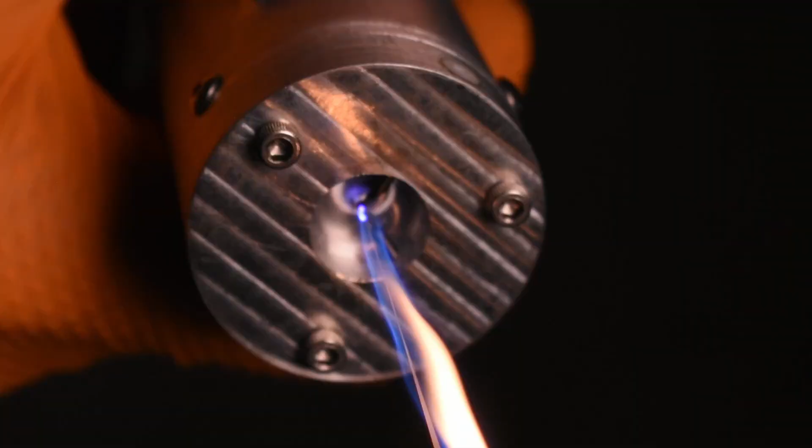Firelaser works by forming a very thin stream of fuel and igniting it with an electric arc. It's fully self-contained with a battery, fuel tank, and pump. It's basically a mini precision flamethrower, but looks vaguely like a lightsaber.

As with all of my projects, after the first version I always come up with new ideas for a second. Basically a never-ending arms race between me and myself.

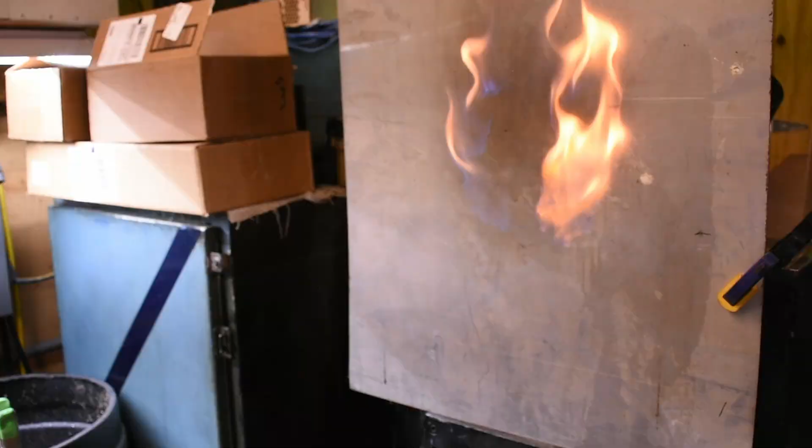For Firelaser, the biggest thing I wanted to fix was the wind issue. The flame was incredibly susceptible to even slight breezes. There isn't any way to completely solve the wind problem, at least not without switching to a completely different type of blade or using very exotic fuels, but there are ways to make it better.

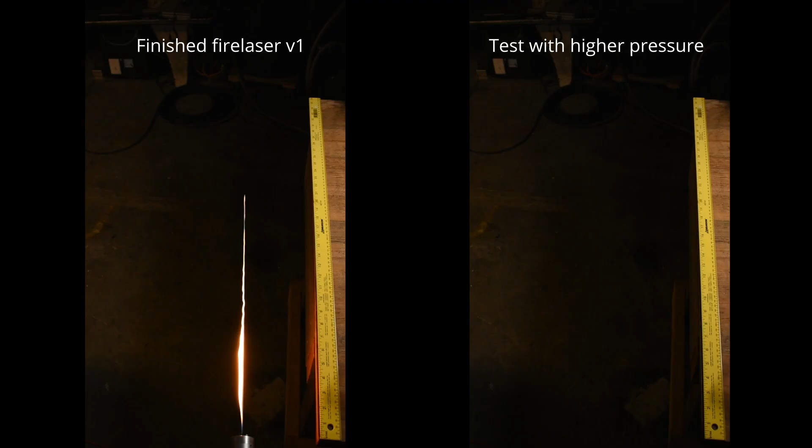What I did find when testing the previous version is that higher fuel pressure tends to result in a more stable flame. To get higher pressure, I need to completely redesign the pump.

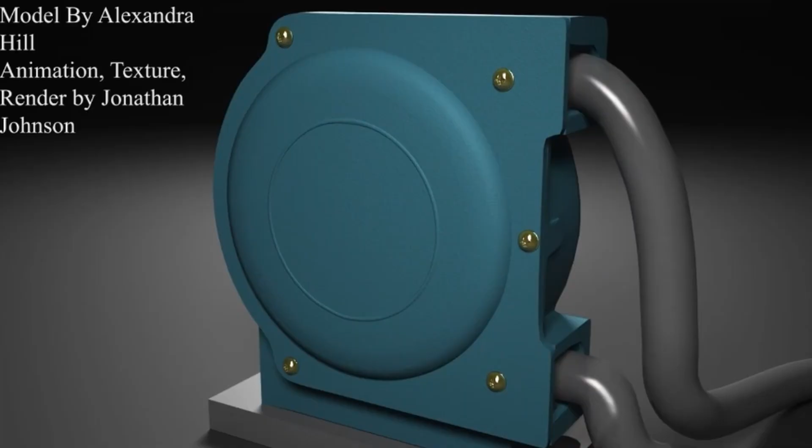The old pump used rollers to squeeze a flexible tube over and over to pump fluid along. This is called a peristaltic pump, and they are quite common when it comes to pumping chemicals, like fuels or solvents, since there's no seals to potentially leak.

The pump needs tubing that the rollers can squish closed to form a moving seal to pump the fluid, so the tubing needs to be quite soft and flexible. The downside is, it's so flexible that under high pressure, the tube itself starts to expand and leak around the fittings.

I previously fixed this in the old pump by using small clamps to keep the tube from popping off the fittings. But even with the clamps, it still couldn't go much above 30 psi without starting to leak.

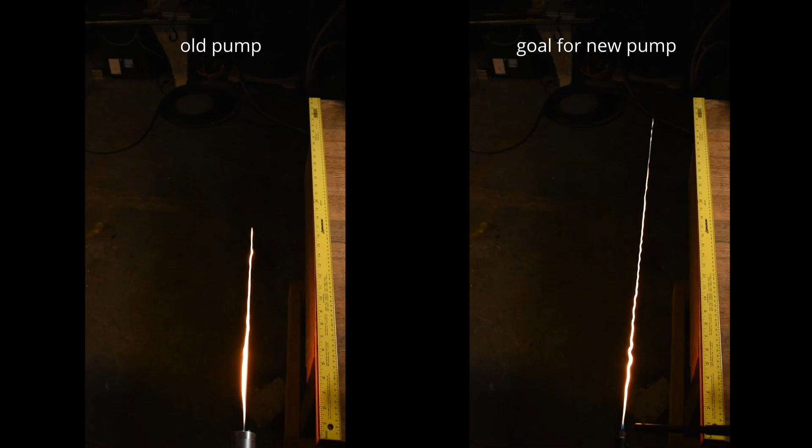For the new pump, I wanted to make sure I could reliably reach higher pressures and flows to produce a more resilient flame. Instead of trying to find a way to get a peristaltic pump to work, I'm going to revisit one of my older designs that I couldn't get working the first time, something called a diaphragm pump.

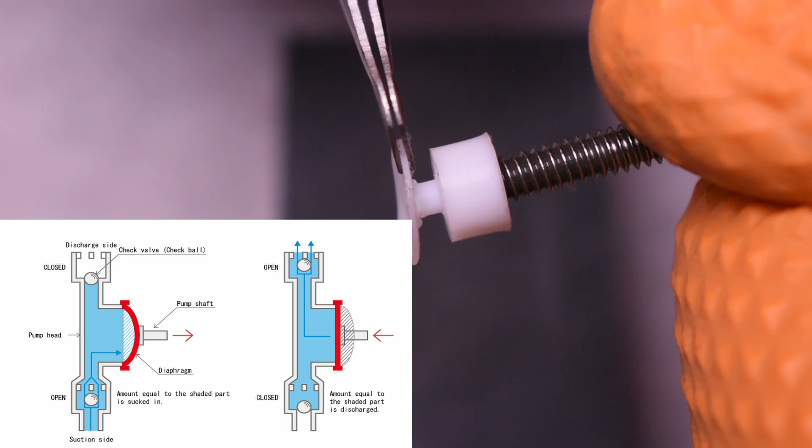Diaphragm pumps are common in industrial applications for pumping harsh fluids since they have no moving seals. Hence, catastrophic leaks tend to be pretty rare, which is perfect since I'd prefer to avoid spraying fuel all over my hands when I'm using it.

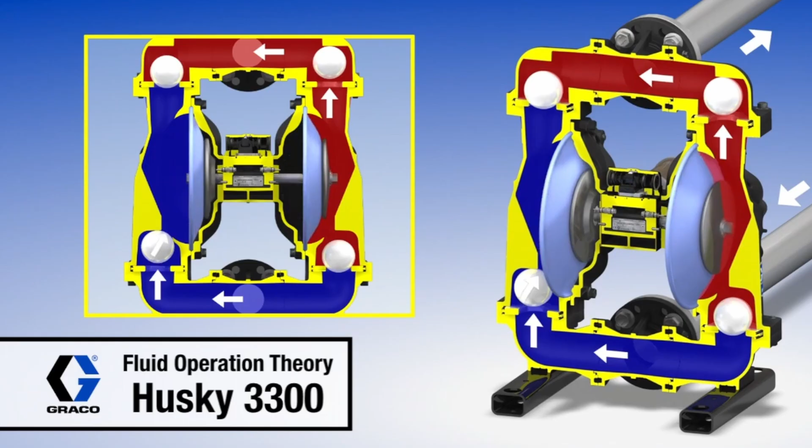The industrial pumps are usually air-powered. They have two flexible rubber parts on each side which are called the diaphragms. The outside of each is in contact with whatever fluid you're trying to pump, and the inside area is where

the pressurized air goes. A valve alternates which side gets pressure to make the diaphragm move back and forth. That motion, along with some check valves, is what pumps the fluid.

Obviously, I don't want to hook up an airline to run my pump, so I'm going to move the diaphragm with a motor instead. Previously, I tried making check valves by using just a drilled hole as the sealing surface, but they leaked so bad that they might as well have not even been there.

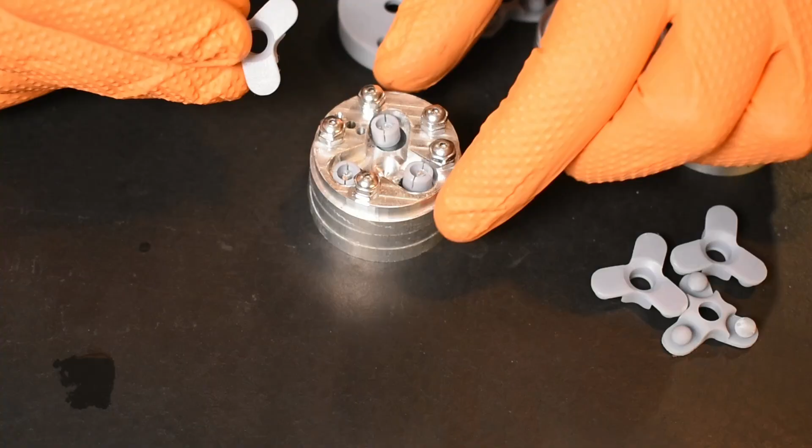I spent quite a lot of time on various pump designs, but they all suffered from the leaky check valves, which is why I eventually gave up on them and switched to the peristaltic pump.

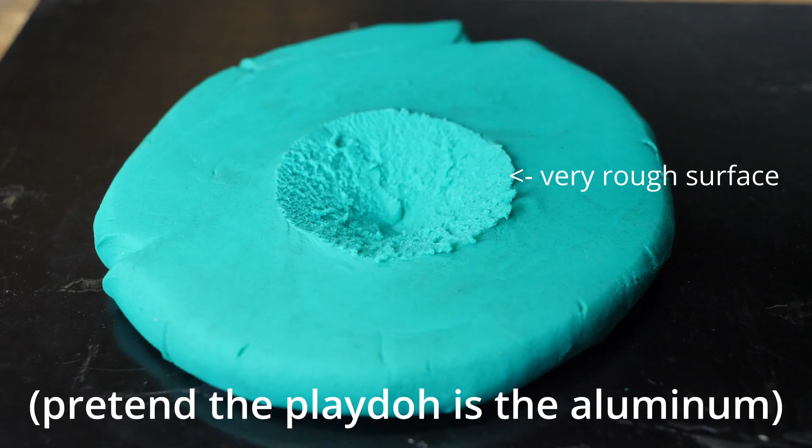This time, however, thanks to some comments on the video of my last version, I'm going to attempt to seat the valves into the pump housing by lightly tapping on them. In theory, the soft aluminum that the pump is made out of will deform a tiny bit and leave behind a surface that perfectly matches the ball.

Another issue with the older pump versions was making good diaphragms. At the time, I was still planning on using acetone in the fuel mixture, and finding a material compatible with both acetone and the other ingredients was nearly impossible.

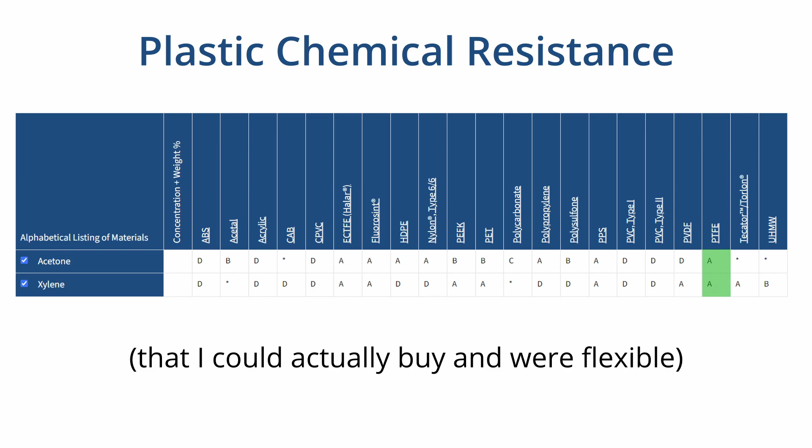The only options were exotic plastics like FEP or Teflon, neither of which were stretchy enough, so I had to make weird designs to try to get it to work.

Eventually I found a replacement for acetone which allowed me to use Viton tubing, which is what the final pump for the previous version used. I'm able to get thin sheets of Viton as well, so that is what I'm going to try using for these new diaphragms.

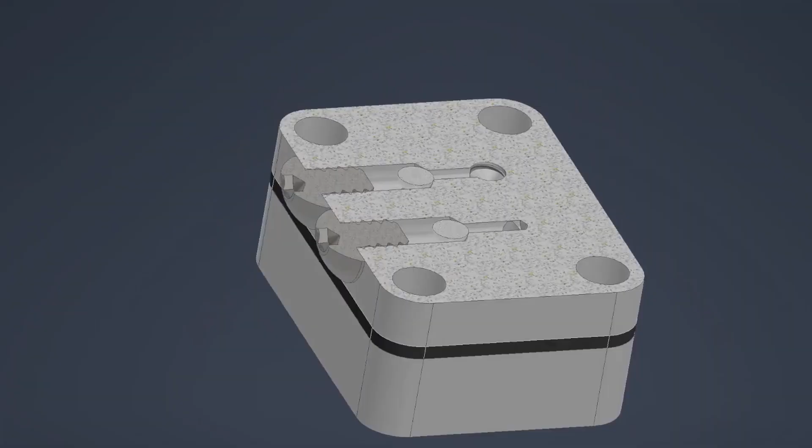But before I get too carried away, I'm going to make a small simple prototype to make sure everything works the way I expect before designing the entire thing.

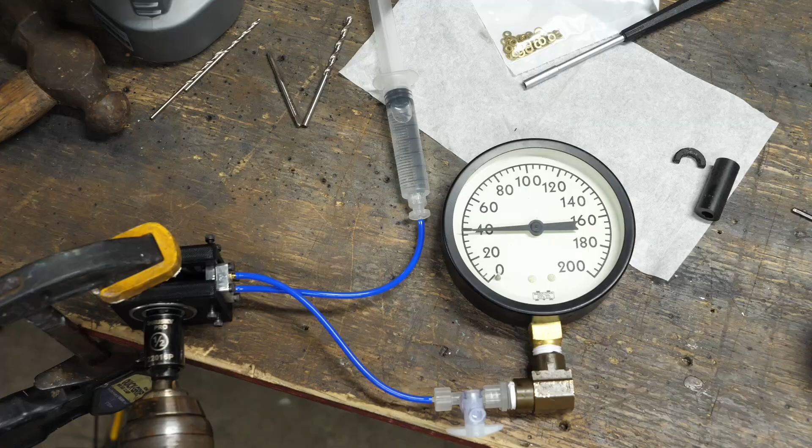Amazingly, I finished assembling the pump and it actually worked, which is already a big improvement over all my previous diaphragm pumps. Now that the proof of concept works, I can make a full design based on the prototype.

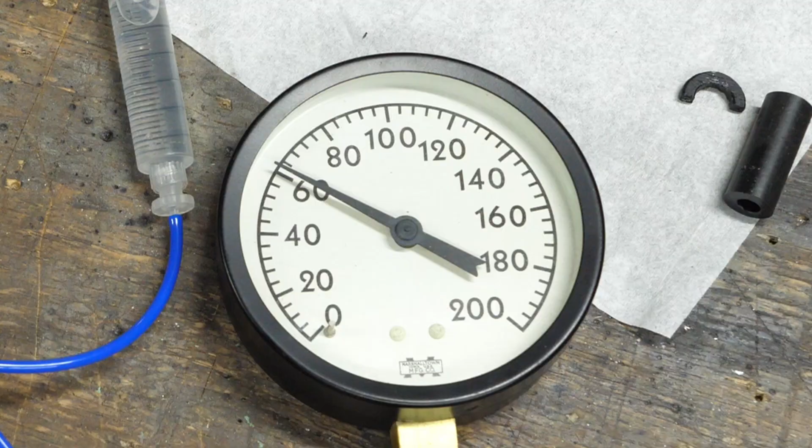With just one diaphragm, the pressure output is very inconsistent since the pump is only outputting fuel for half of the rotation. To fix this, I put 8 of those single pumps all around the crankshaft so they will pump in sequence, giving a smooth and consistent output. Along with redesigning for the new pump, I also redesigned the entire layout.

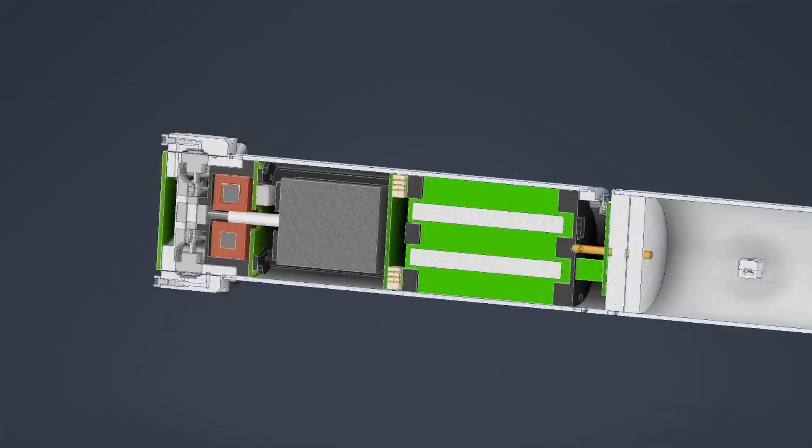This new version uses a larger tube, which allows me to fit much more stuff inside and gives more freedom in what parts I can use. Even though I'm trying to make all the parts as reliable as possible, I'm sure there are still going to be issues, and if it isn't going to be reliable, it should at least be easy to fix. That's why both of the parts that connect to the main tube are threaded, so I can easily gain access, along with some fancy methods of getting fuel and USB power through rotating connections, so I don't need to worry about connecting and disconnecting wires or tubes every time I take it apart.

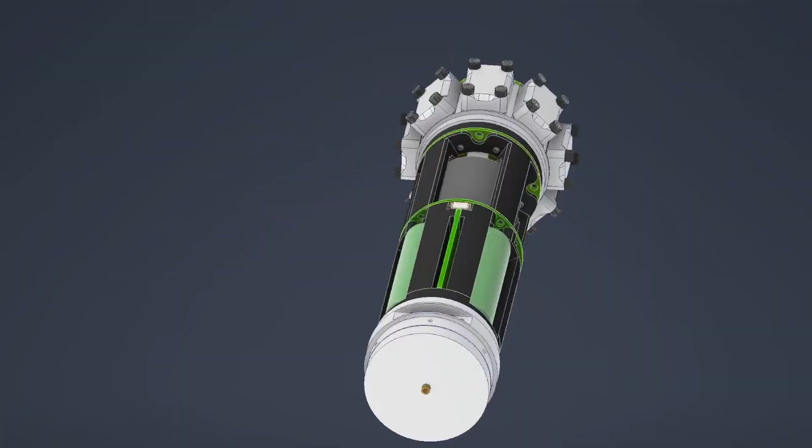In the meantime, let's get back to the pump. Usually I machine all of the parts for my projects by myself, but because the main part of the pump is so complicated, and I no longer have a fourth axis for the CNC, I wasn't looking forward to it.

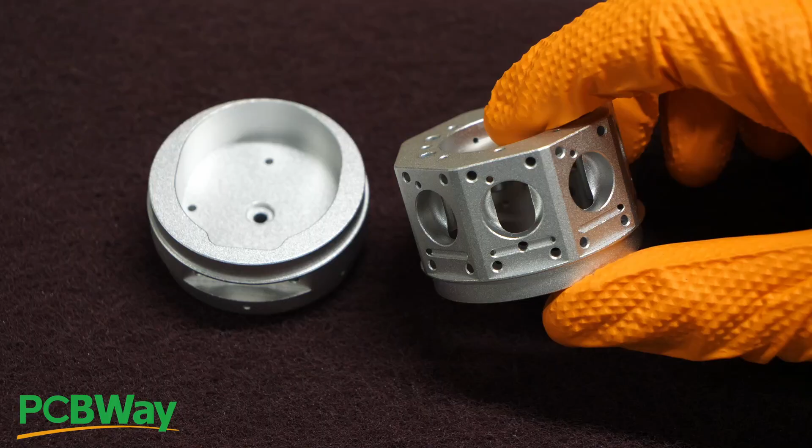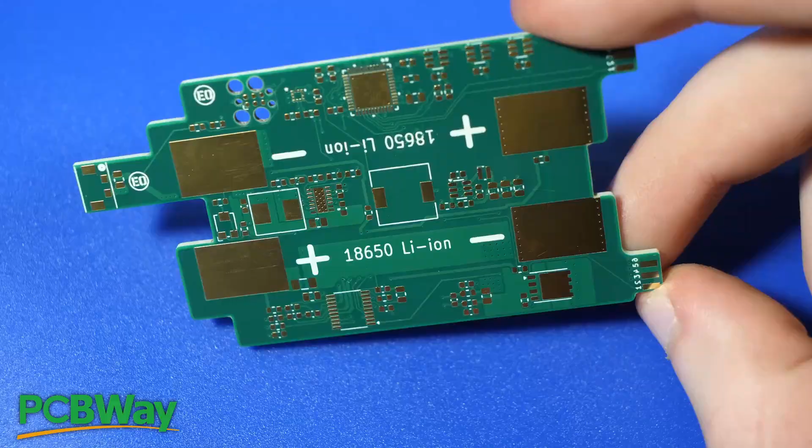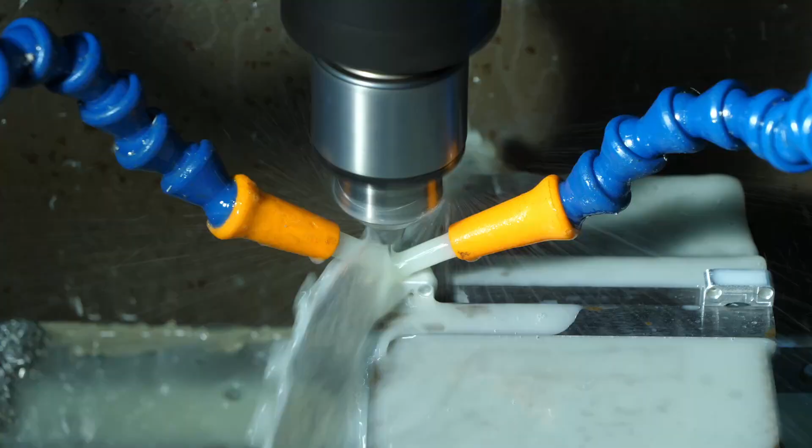I ended up still machining the valve caps myself since I knew I'd need to make some small adjustments, and they were much simpler so it didn't take too long. I machined all of them, but only drilled the flow paths on one so I could verify it worked before I potentially scrapped all of them if it didn't.

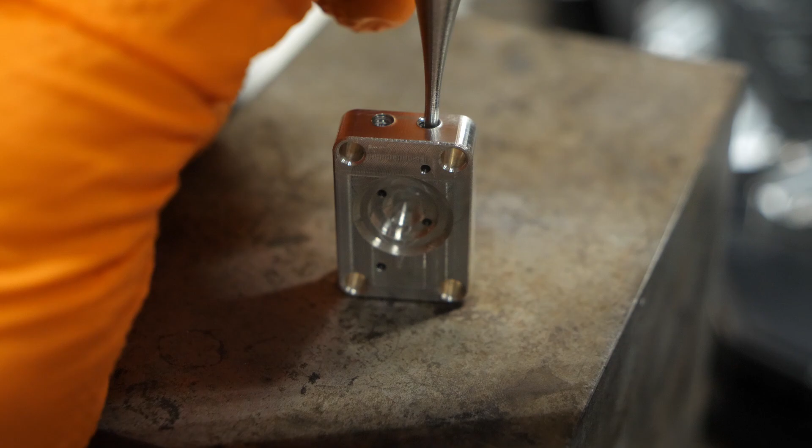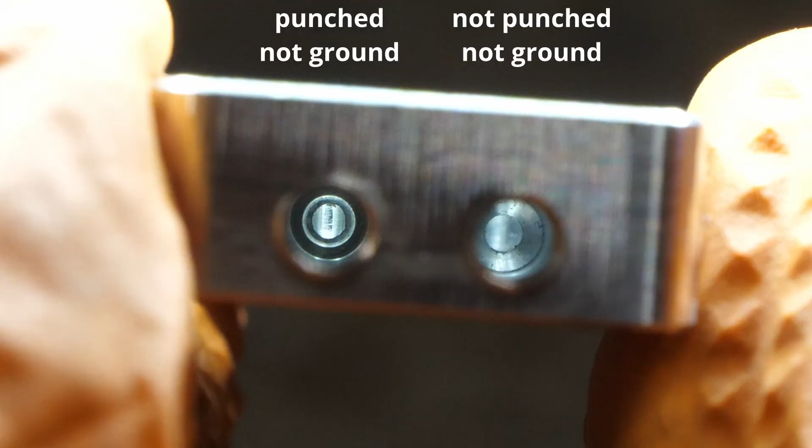I used the same method as in the test setup to make valve seats for the balls to seal against. Only this time I went a step further and made a tool for grinding the valve seats. This is done professionally for valves in engines, and I got valve grinding paste made specifically for it, but it ended up being way too aggressive for these small valves. I found some much finer paste and gently ground the seats to do my best to get the best seal possible. The grinding made a noticeable difference in the before and after finish of the valve seat. It's much smoother and more uniform, which should result in a better seal.

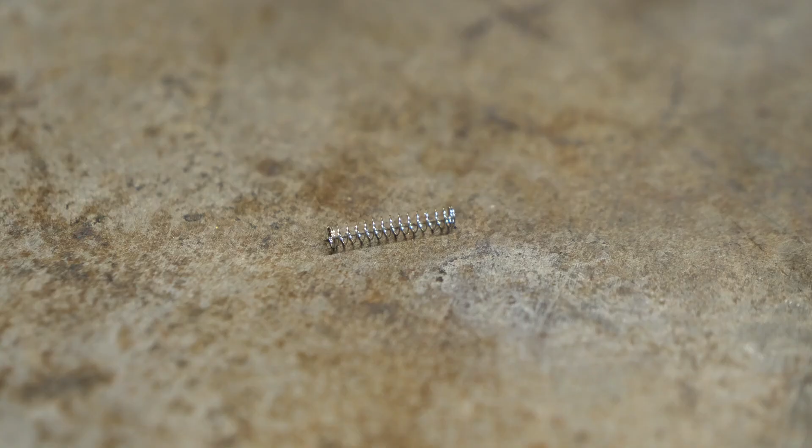Because these valves are so small, I couldn't find anywhere to buy small enough preload springs for them, so I also need to make those. I usually do this on the lathe, but since I need at least 16 for all of the valves, I decided to have a go at automating it. I threw together a quick G-code program to wind two at a time on my CNC mill instead.

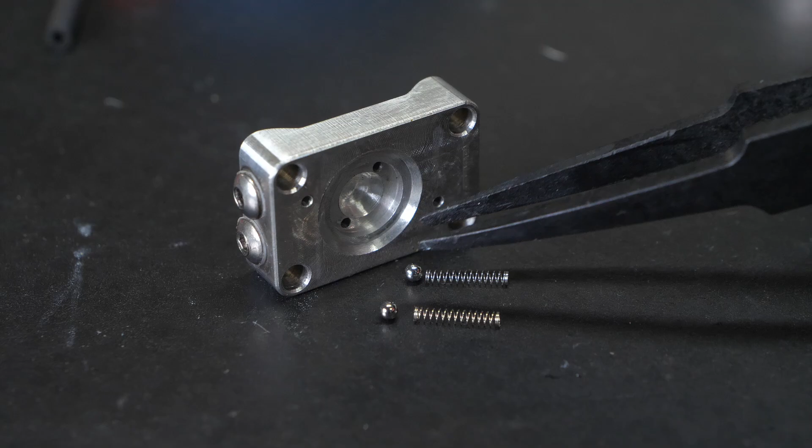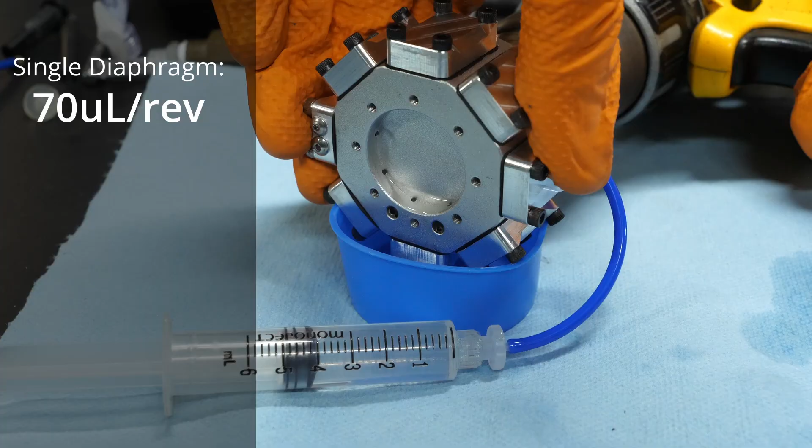Now, with hopefully the best valves I've ever made, it's time to see how well they actually work. I assembled the new pump but only put one finished valve cap on; the others are just blank so I could test the one by itself. With the new pump fully assembled and one pump element working, I measured the flow rate by counting how many rotations of the input shaft it took to move a known amount of fluid, in this case the size of that syringe. The resulting flow was about 70 microliters per pump rotation, so in theory, with all 8 of the pump sections installed, it should output about 8 times that, which is 560 microliters per rotation. This all looks promising, so I'm going to move on to trying with all 8 pump sections.

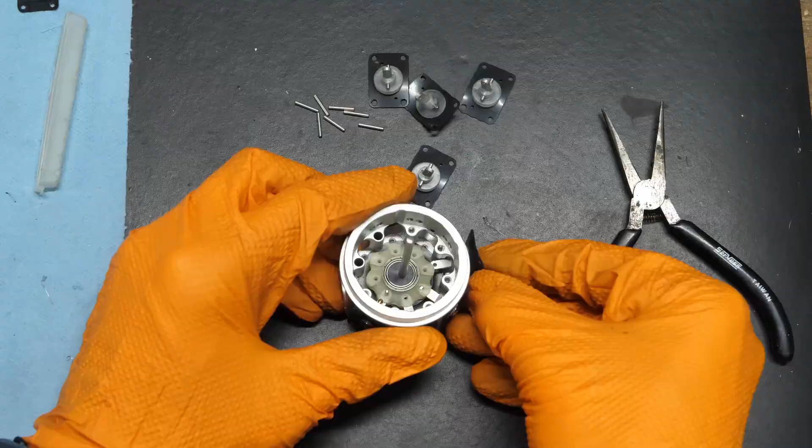After finishing the machining and grinding on the rest of the valve caps, I fully assembled everything and ran the same flow test again. But this time I got some really strange results: even with all 8 sections working, it was only pumping about twice as much fluid as the single section.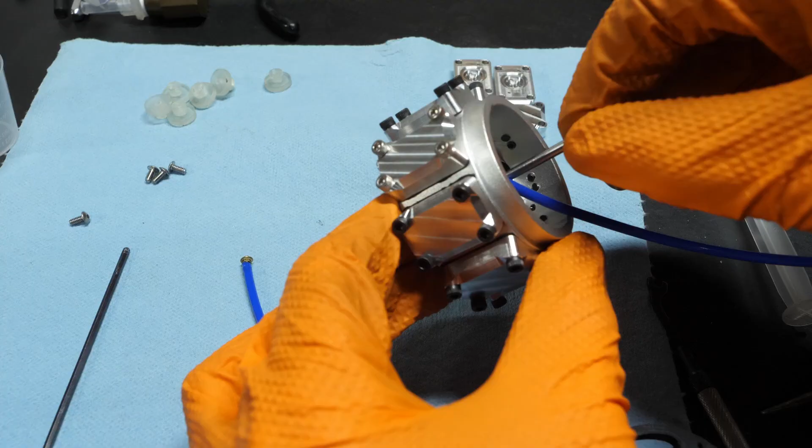This didn't make any sense, so I pulled off all the valve caps and tested them individually to make sure none of them were leaking or stuck open, and they all seemed just fine. Maybe since it's not fully assembled and a support bearing is missing, the drive shaft isn't being held in line very well.

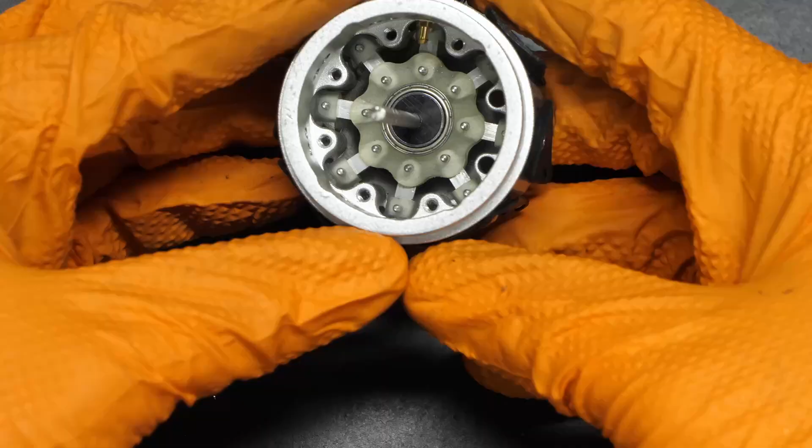The crank responsible for driving the pistons is trying to resist being bent out of position due to the load of all the pump sections. With just one section working, there wouldn't have been all that much force, but with all of them installed now, I think it might be too much.

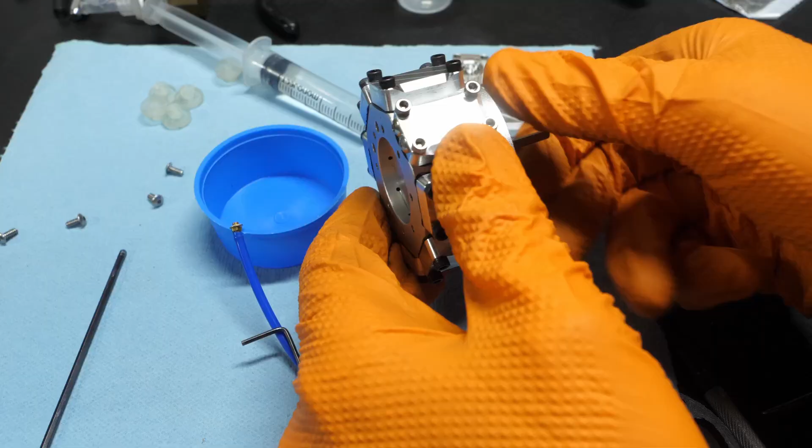The pump is supposed to have 2 bearings supporting the input shaft. One is installed up at the front, but I never installed the other one since I hadn't made those parts yet. I probably should have realized this was an issue due to how much the pump was shaking around when being driven. Any movement that's going into making the pump shake isn't going into the pumping action, so this could definitely be reducing the expected flow.

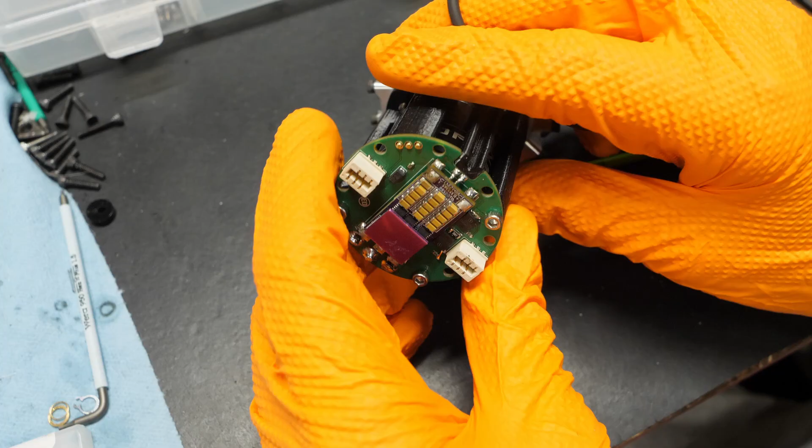To fix this, I assembled the final motor and electronics and attached it to the pump. This way the pump shaft is properly held in place, and also has the final motor I plan on using to drive everything. This way I'll be able to test exactly how the final assembly will perform.

With the new motor and everything properly assembled, I'm definitely getting more flow. However, when I calculated the expected flow rate, it was still way less than it should have been. The reason it seemed like I was getting so much more flow was just because the pump was running faster than before. But after accounting for that, I'm still getting a lot less than I should be.

I noticed while testing that when the pump starts, it initially has a very high flow rate, but it quickly drops down to barely anything. When I investigated further, I saw that the pump was not only pulling in liquid while it was running, but even after the motor had stopped spinning, it would continue to draw in a bit more fuel. This led me to think there was a restriction on the inlet somewhere.

A restriction would make it so no matter how fast the pump went, or how many pumping elements I had working together, only so much liquid could be sucked in. If this is the issue, it makes sense that after the motor is shut off, the liquid finally has enough time to catch up and reach all the diaphragms, making it so on the next startup, all the diaphragms are full of fuel and can pump at the full expected rate, but only for one cycle before they'd be starved for fuel again.

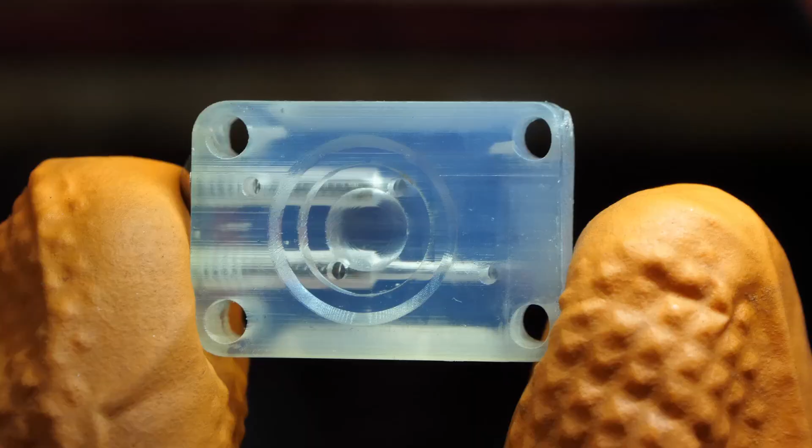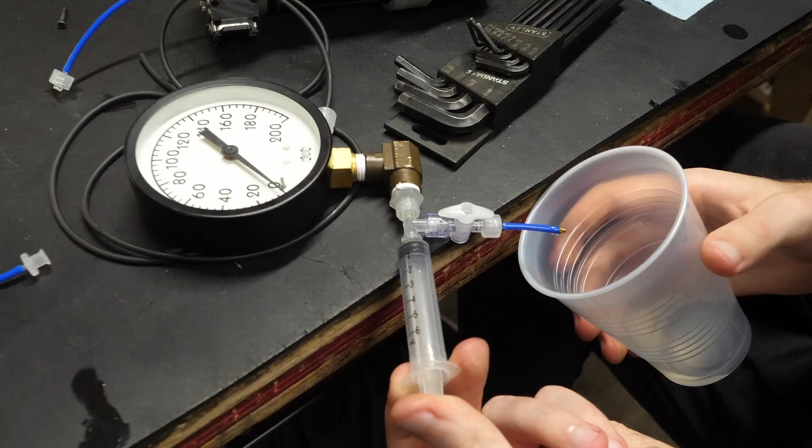I knew the tubing connections and inlet holes in the pump were quite small and would eventually be the limiting factor on how fast it could pump, but I didn't expect to run into the issue so soon. With some quick tests pushing the target flow of fluid through those same tube and fitting restrictions, it only takes about 2 psi, which isn't much, so something else must be going on.

If everything leading up to the pump is good, then the problem must be inside the pump. The fuel comes into the pump through this fitting, then spreads out to each pump section by going through these slots and angled holes. When I took apart the pump, I noticed that the rubber seemed to be getting squeezed down into those small slots where the fuel was supposed to come in.

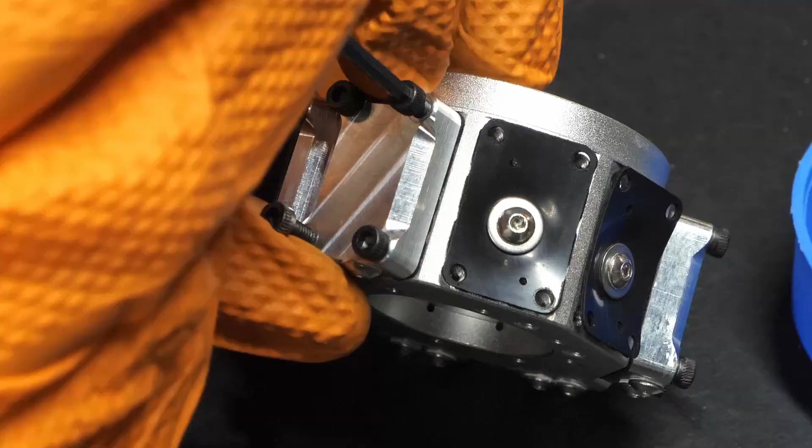When I tighten down the valve caps, a small amount of the rubber gets squished out from around the edges. This is fine since it means everything is sealing properly, but I think it may also be happening on the inside, which isn't as good.

If the rubber is getting squeezed into those slots where the fuel is supposed to feed through, it could end up partially blocking and limiting the flow. I decided to test cutting out an area in the rubber for that slot so it would stay clear. I briefly tried modifying one of the existing diaphragms by hand, but quickly realized I should just leave some stuff to robots, so I lasered out the new ones instead.

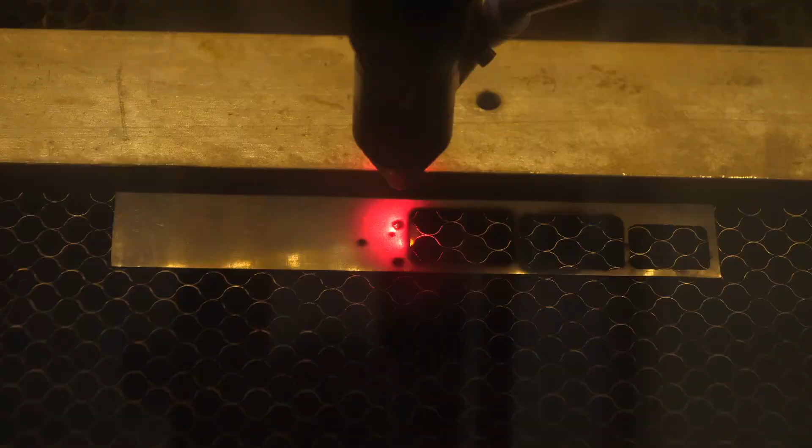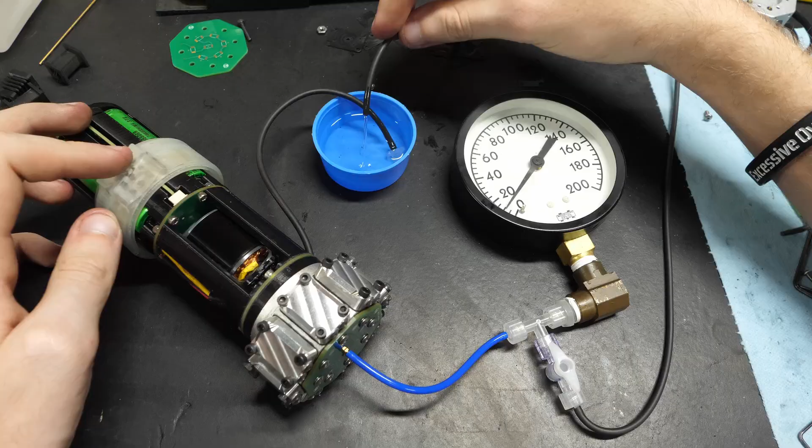The new diaphragms leave an opening for the entire length of that slot to avoid restricting the flow as much as possible. I replaced all of them and once again ran a flow test. It is a little better than before, but still less than it should be. It still has the same issue where it continues to draw in fluid after the motor stops, and has a significantly higher flow rate right when the pump starts.

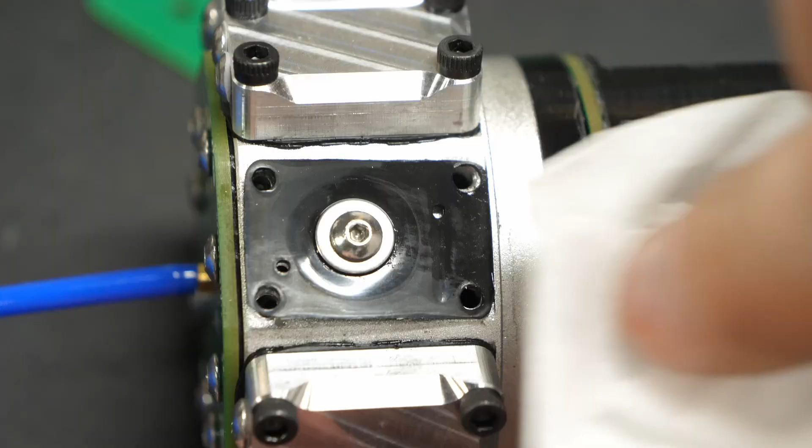At the top of the stroke, the rubber is being pushed by the entire piston face, so there isn't anywhere for it to go, and all the fluid above it is forced through the outlet valve. At the bottom of the stroke, I'm relying on this washer and screw to hold the rubber to the piston head. There needs to be some unsupported space between the washer and cylinder wall to allow the rubber to stretch and flex so the piston can actually move.

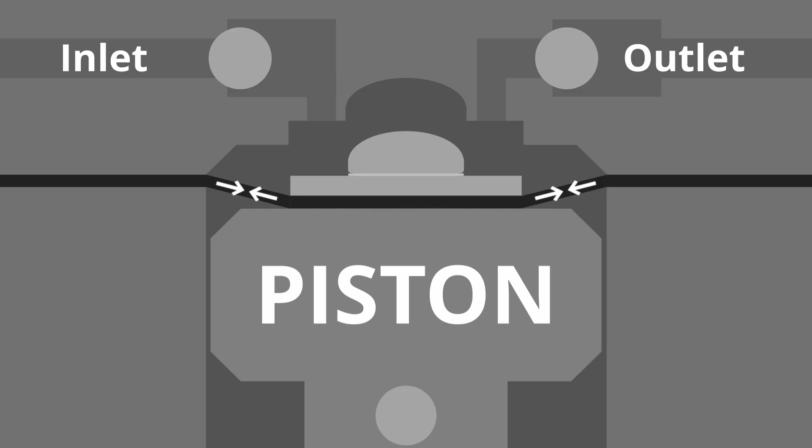I was hoping the stretchiness of the rubber would cause the area to be pulled tight when the piston moved down, preventing the suction from pulling it in too much, but because of the flow issues, I'm going to fix it just in case. If the edge of the diaphragm is being sucked in instead of the fuel, then the output flow would drop. It makes sense that if all the diaphragms were being stretched in like that while the pump was running, it would take some time after the pump stopped for them to pull back to normal and bring in the remaining amount of liquid.

I'm going to make a new piece that replaces the washer and holds the rubber much closer to the edge. That way it'll be pulled tighter and not be as easy to get sucked in instead of the fuel.

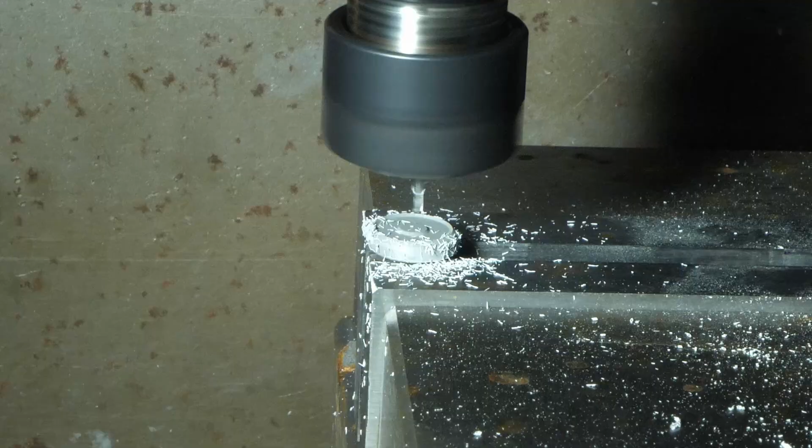I preemptively cast both the new washers and new pistons out of high-strength epoxy instead of just using the SLA printed parts to make sure they wouldn't break under high pressures. I still had to do some machining to drill the holes for the pins and make the threads, but casting the parts made it much easier than machining the entire thing from scratch, especially with very small and intricate parts.

The washers were so small and thin that I ended up making a little vacuum chuck that sucks them down in place so I can machine them without needing to try to grab them in a vise.

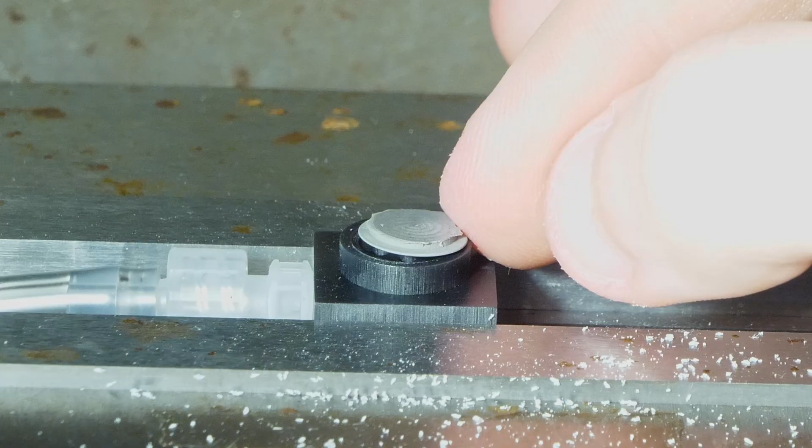When I took apart the pump to change them out, I found some of the old SLA printed pistons already had their threads totally stripped out, so it's a good thing I switched to the new cast ones. I wonder if those stripped pistons were also contributing to the low flow rate.

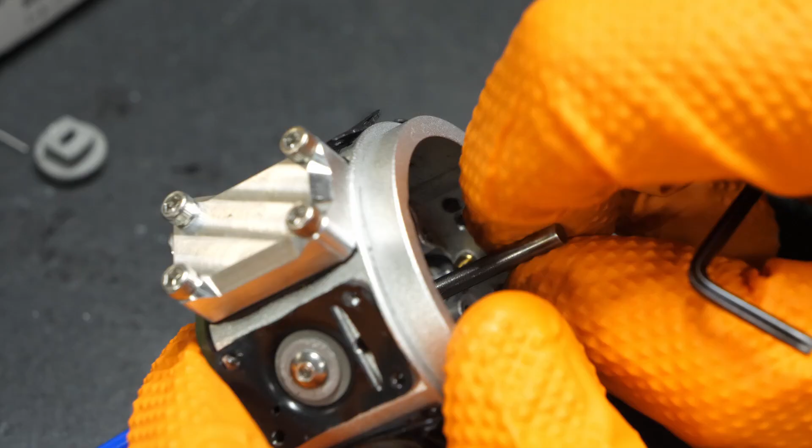The new pistons are definitely stretching the diaphragms more than the old ones. There is much more resistance when I turn the pump, which worries me a bit since I don't want to end up stretching them too far and damaging them, but I'll worry about that if it becomes an issue.

I was kind of afraid to really push it and see how much pressure it could produce, so I only went up to about 80 psi, which is still 3 times higher than what the last version usually ran at. However, after testing for a while, I still managed to break it. Under barely any load, I heard a snap sound come from the pump and then the flow rate dropped.

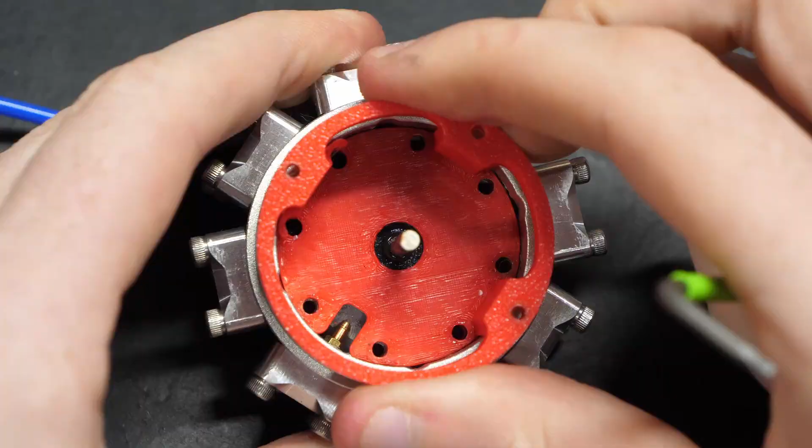Oh no. This time it was because I never ended up upgrading the main part that drives all the pistons, and it was still the original 3D print, which had finally decided to crack. I probably could have cast replacements like I did with the pistons, but I instead went straight to machining the new ones out of aluminum.

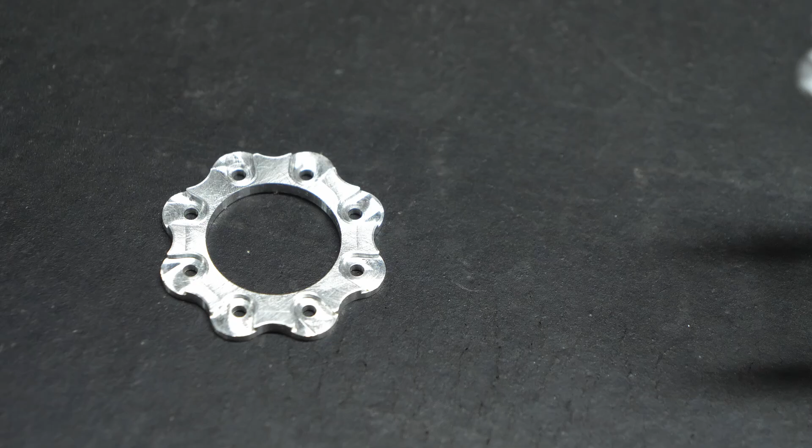While everything was apart anyway, I also switched to the final pump body. I ordered two so that I would have a backup. The only difference on the second is that it's sized for me to be able to cut threads into it so I can thread the outer tube onto it. I used the CNC machine with this tool called a thread mill.

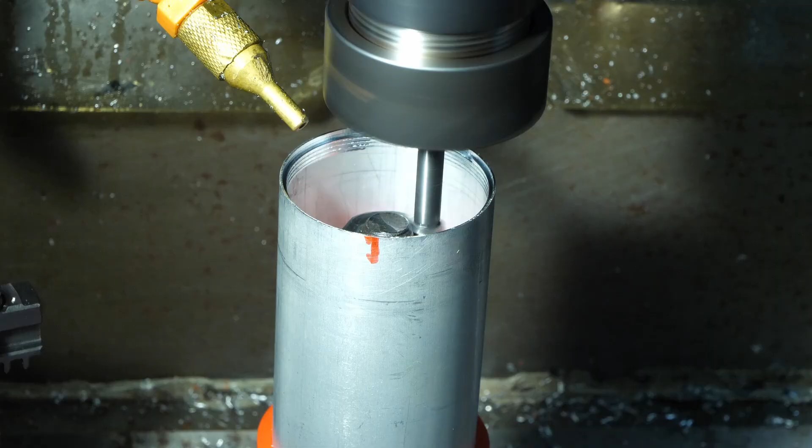I threaded the new pump body and outer tube and they look great, but they don't thread together well. There's one major problem with using aluminum threads: aluminum is prone to something called thread galling. This is when the threads in contact with each other tend to stick together. Small areas are being cold welded together, causing little globs of material to form and damage the threads.

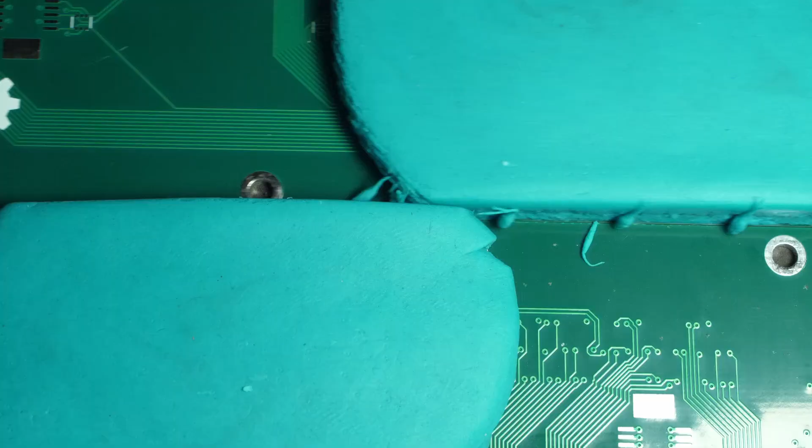As you continue to thread the parts together, the globs continue to grow. Usually by the time you can feel this, the act of even trying to unscrew the threads can be enough to completely destroy them. This exact issue is why anti-seize exists, and is often used on stainless steel and aluminum, which are both very susceptible to galling.

Those of you who have worked with anti-seize know it gets absolutely everywhere and is a mess, so I went with anodizing instead. This process produces a hard oxide layer over the aluminum, much tougher than the thin coating that forms naturally. I anodized both of the parts I plan on threading into the tube, and the threads now fit great.

After moving everything over to the new pump housing, I think there's still one more suspect that might be holding back the flow.

Remember those springs I wound way back at the beginning? Well, I kinda just guessed how stiff they needed to be. While going through the test results, I saw it was still way underperforming, so I finally did some calculations to see how stiff the springs should be.

Turns out the ones that are in it are putting way more preload on the valves than needed. This would explain the flow restriction issue I've been having, so I rewound much lighter springs and swapped them all out. Time to see how well all of these fixes work.

After getting the pump fully primed, the flow at no load was about 30% better than the old springs, and 10 times better than the old version. Flow is only part of the equation though.

The previous pump could only reach about 30 psi. I know the new one should be able to reach at least 80, but the question is how high can it go before something breaks?

For all of these tests, I have the pump hooked up to a pressure gauge with a valve so I can restrict the output. I slowly closed the valve to see what pressure it could reach. It maxed out at 140 psi and actually survived the test without breaking anything. That's almost 5 times the pressure of the previous version. This opens the door to much stronger streams that should be more wind resistant.

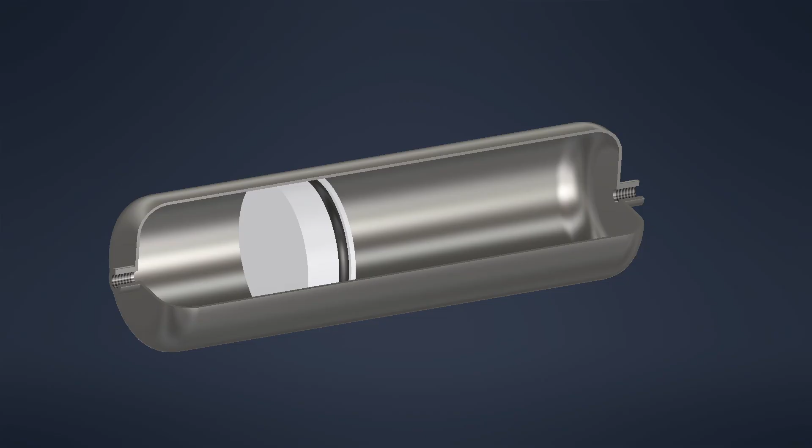Storing the fuel was super easy compared to everything else. Last time I used the outer tube as the tank and had a sealed plug that could slide in and out as fuel was pulled out by the pump or filled up through the fill port.

This time though, in the spirit of not having any seals that could leak fuel all over me, I'm going to revisit the collapsible plastic tank idea from the last version.

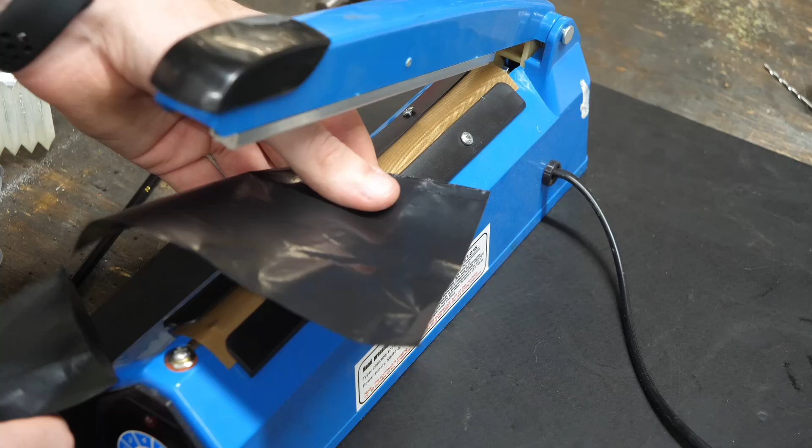I got one of these cheap heat sealers used to seal plastic bags shut. It has a metal strip that it heats up to melt a thin section of plastic together and make a secure bond. All I did was seal up some strips of polyethylene plastic, which is the same thing these black garbage bags are made of, and attach this metal connector that allows me to get fuel in and out of the bag. I tested the plastic with a small amount of fuel to make sure it could survive without deteriorating.

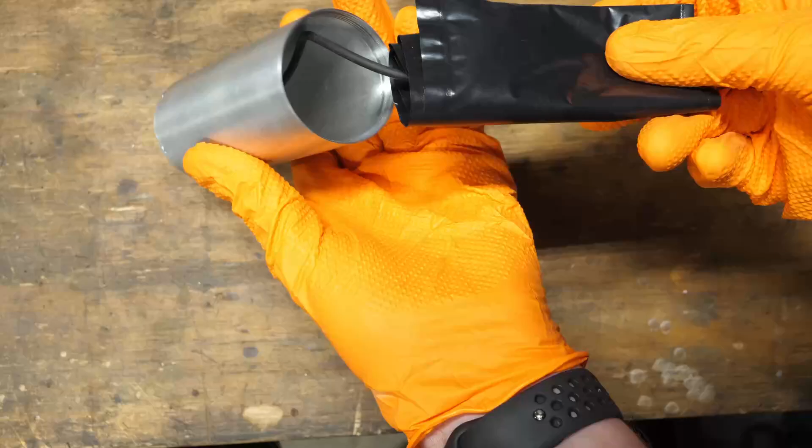After a few days it seemed about the same, so I think it'll hold up just fine. It then gets rolled up so it can fit inside of some tube and is attached to a brass fitting on the end to act as a new fuel port. Instead of using a large syringe to fill it like the old version, this one lets me completely take off the tank and either swap it for a full one or refill it.

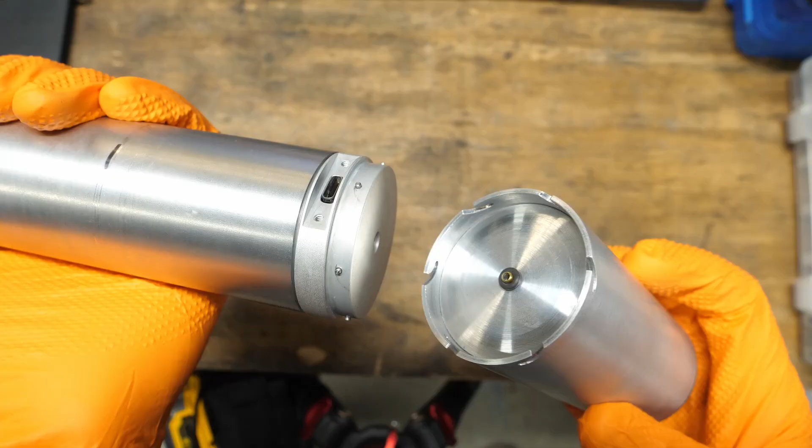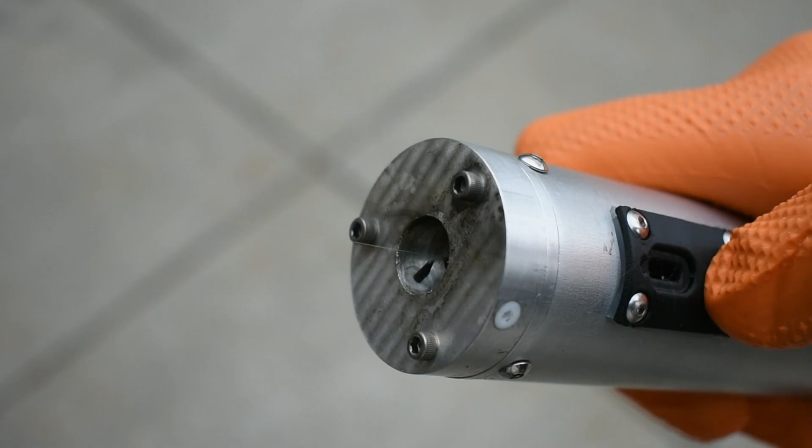Finally, there's the output after the pump, which is much more challenging. The key part of this entire project is the nozzle. I'm going to go more in depth with the nozzles in a future video, but the basic requirement is that

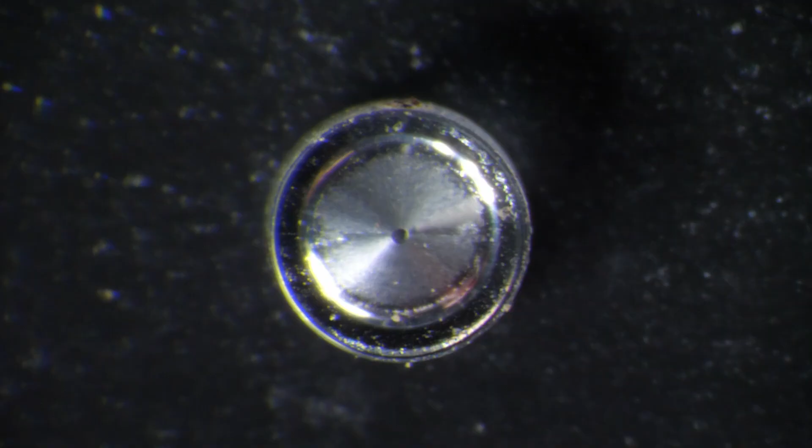it needs to be a very small hole, only about 3 thou in diameter, which is about the same size as a single hair. Before the fuel makes it to the nozzle, there is one more critical part.

Since the nozzles are so small, they are very susceptible to clogging. Even dust in the air is enough to plug them. This was a big issue with the previous version.

Not only did it clog constantly because it didn't have a good filter, but it was really hard to clean the nozzle if it did clog, since the igniter electrodes were permanently attached to the wires such that everything needed disassembled to get access to the nozzle to clean it, only for it to clog again a few minutes later.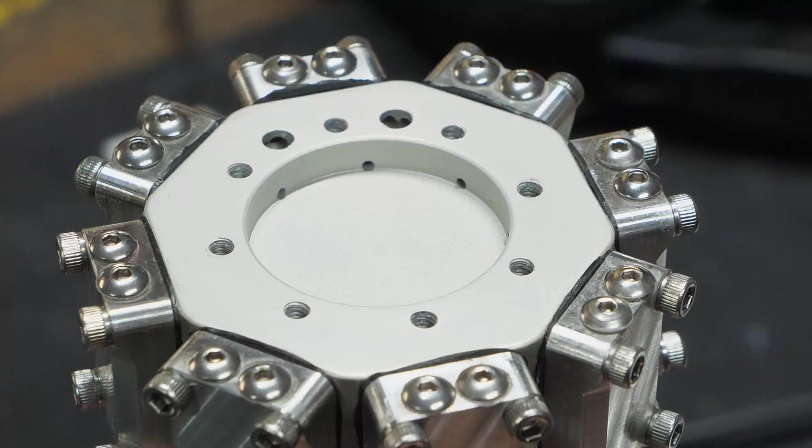For this version, I made a larger filter to handle both the increased flow of the pump and prevent the filter itself from filling up with debris too quickly. It sits in front of the pump where each of the sections outputs fuel.

The main layer is this chemical resistant felt that can filter particles all the way down to 5 micron, which is more than enough since the nozzles themselves are around 76 micron.

The second layer is some fine stainless steel mesh, which isn't actually for filtering out dirt, but is for keeping the fibers from the previous filter getting sucked into the nozzles.

I did some testing with a set of nozzles that ended up being a bit too large, so there wasn't quite enough restriction to build up decent pressure, but I was still able to run everything for a while to make sure it all held up properly.

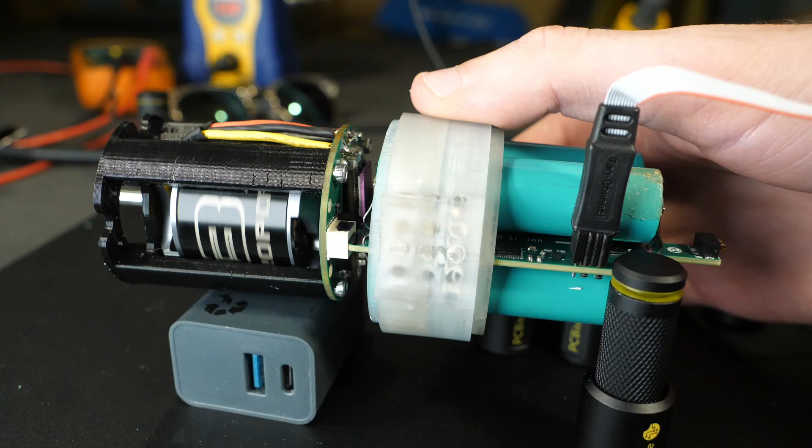It still needs the electric arc to ignite the fuel, which I haven't finished yet. The next video for Firelaser will be the full final assembly and testing to get the best flame I can out of it.